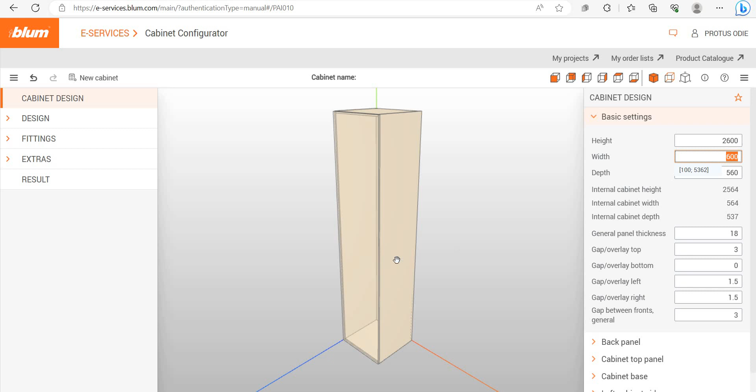The first thing you have to do is go to cabinet design, then basic settings. This is a full height wardrobe, so the height I'll use is 2600, and the width I'll put at 850.

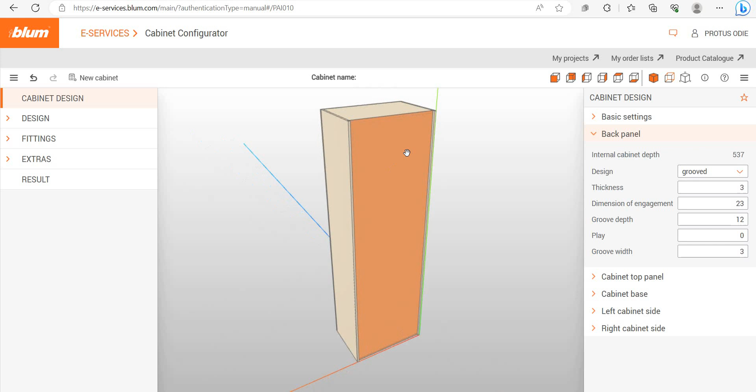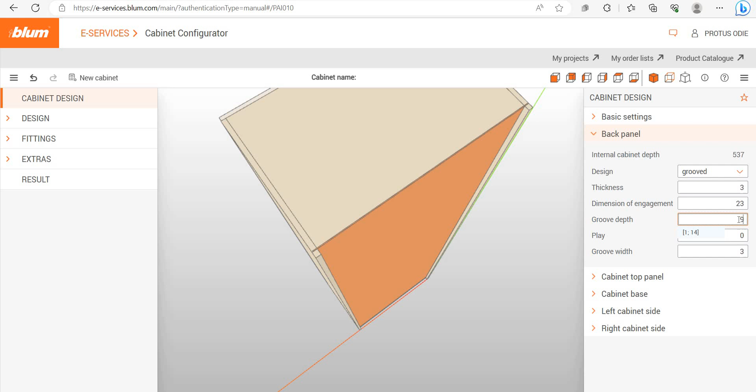The top panel and back panel is a grooved panel with a 3mm board. The grooved panel 3mm board. Then the dimension of engagement is 23. Then groove depth, let me put 9. Groove width is 3. So that's it.

Now I'll come to partition the front. Go to design, then select horizontal gap, and then the vertical gap here.

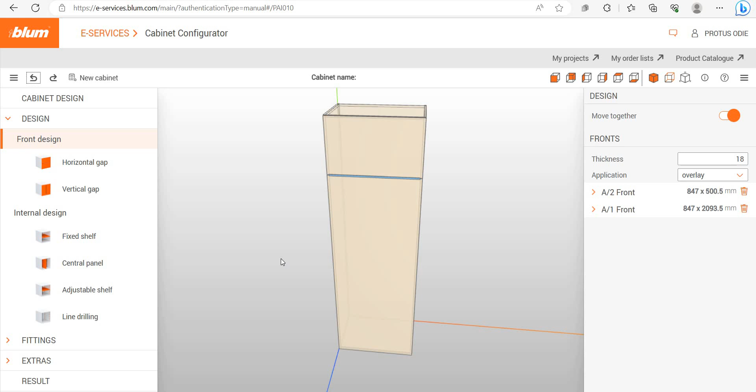Let me just undo. I wanted to create some drawers here first, the drawer panel, like the drawer front. These are 200. No, the 200 here. The 200. Another 200. And the last 200.

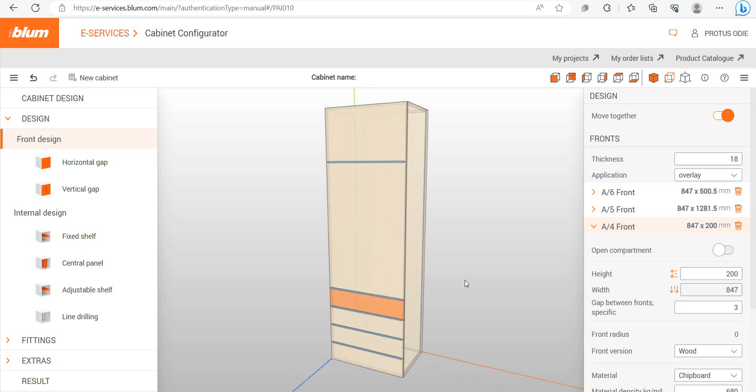And then the double door. Put the double door. There's the double door.

So this top part is 400. 400.

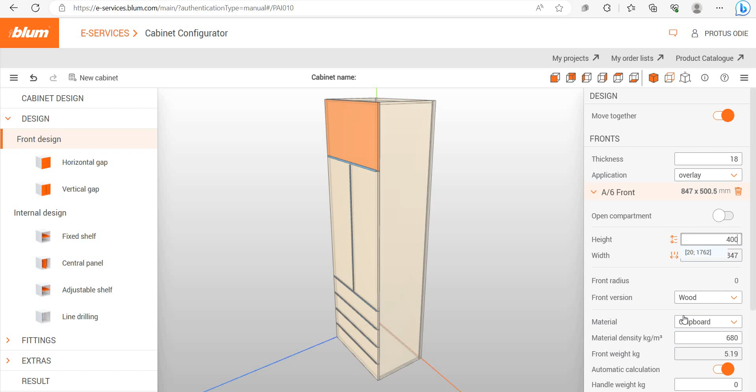Now I can go and put the shelves. Let's use fixed shelf, the first shelf, then the last shelf.

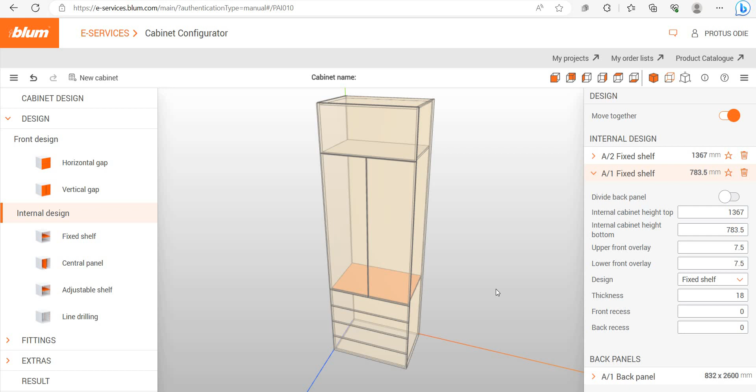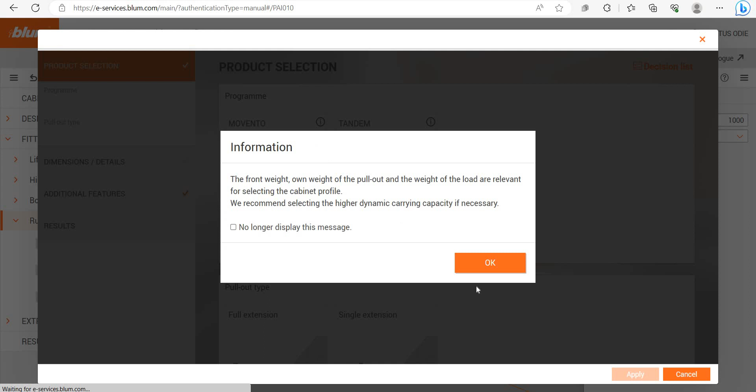Then the next step is we have to put the drawers and specify them. Go to fittings, then runner systems, then drawer high fronted pull-out. You draw the lower drawer, and then specify the settings: tandem box, full extension. So for full extension, we go next.

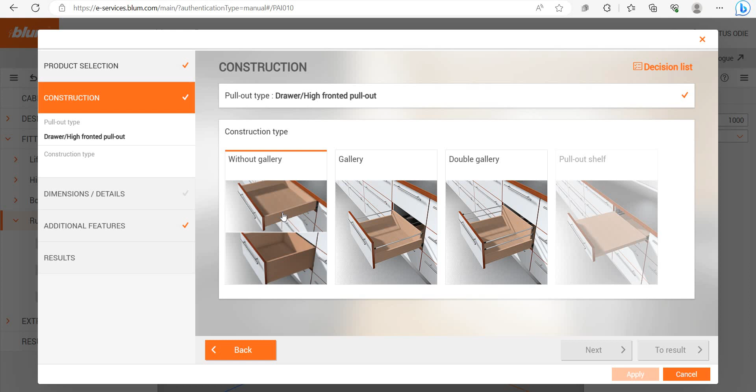High fronted pull-out without gallery. These are the specifications of the drawer, and dynamic carrying capacity 500, length of the runners. Then drawer height, I like 180.

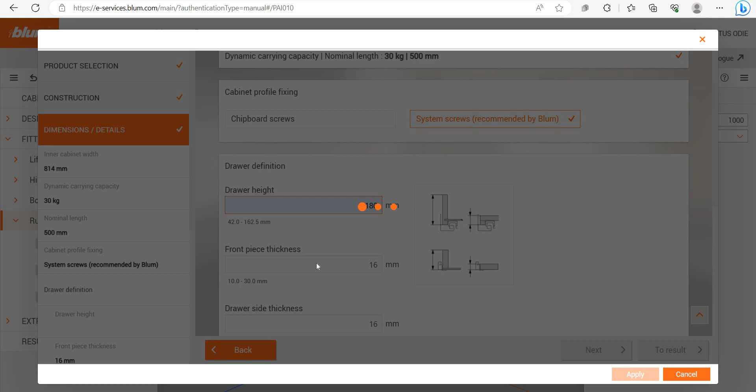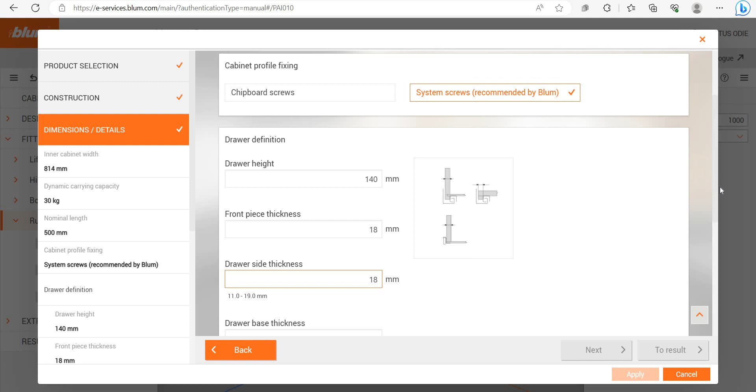This one is too short, too long. Put 140 because 140 is okay for me. Then thickness is 18. Drawer side thickness is also 18. Drawer base thickness is 3.

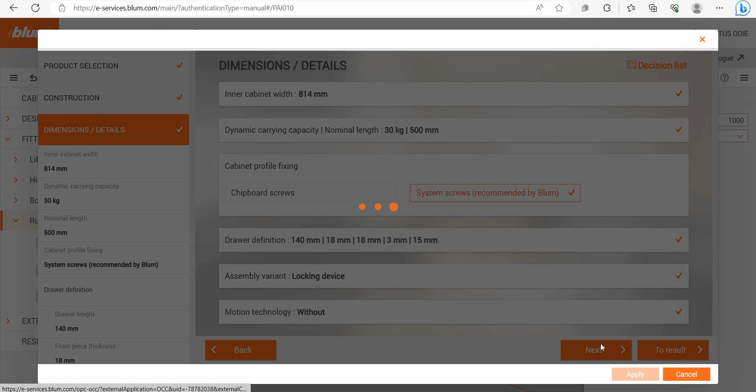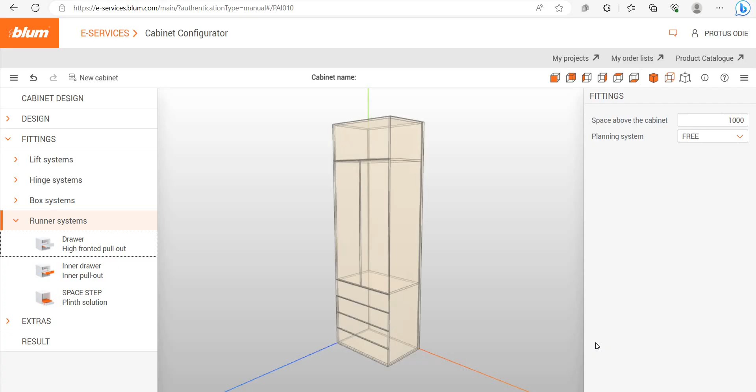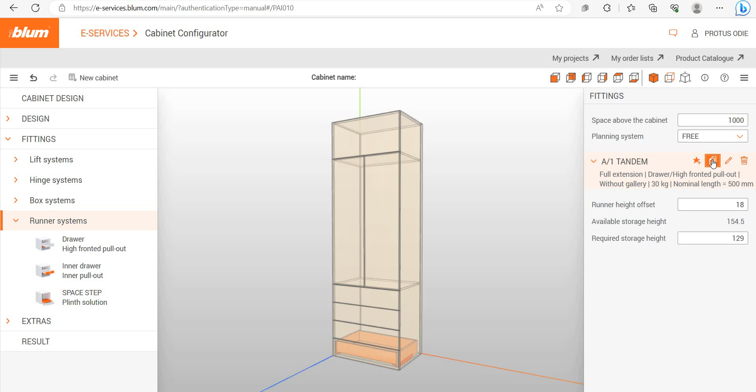Go to result, apply. So that's the drawer. Let me zoom in so you can have a look at it. So this is the Blum runners. I'd like to copy this for the others, 1, 2, 3. So that's now a complete drawer system.

And then for the door, it's just the door. So door is the hinge system. This one is the lift application, the lift application. Standard hinge, overlay.

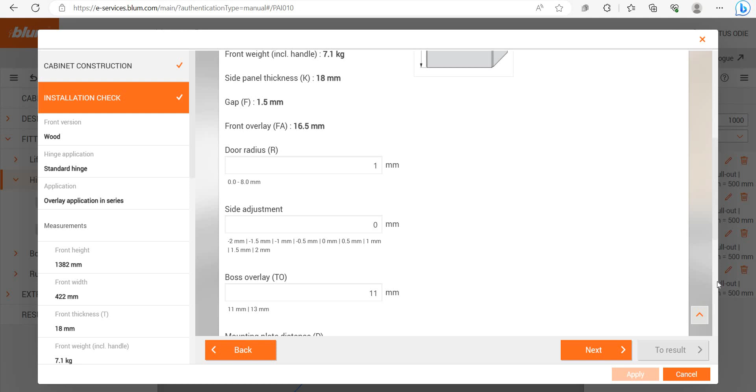So we have the measurements and door radius. Let us use the default settings. Move next.

Then clip on. This CLIP top BLUMOTION is the one that doesn't have to use screws to mount it. This one also, but this is a normal one with the screws, the MODUL, and then screws. There's no corner, then you have the screws. So let me use these normal screws.

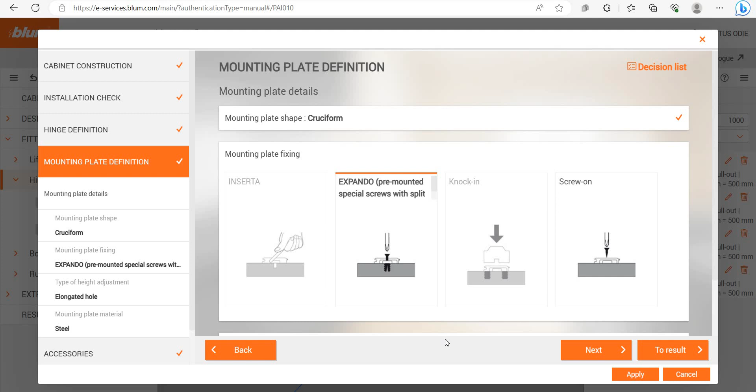Then closing mechanism with spring. Okay, with spring. And then we have to do the mounting plate fixing, we have to screw the normal one. Then chipboard screws.

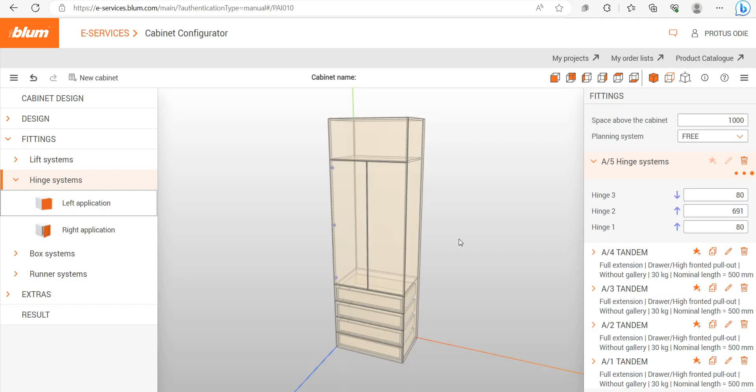Next, then hinge and cover caps. No, to cover. Then let's go to results. So these are the hardware we applied, and it's automatic. It has set it at 3 hinges. Let's see. Also, so this is the other side, the right application.

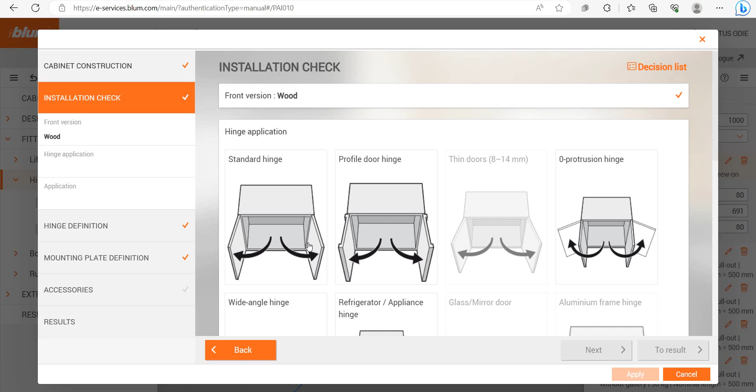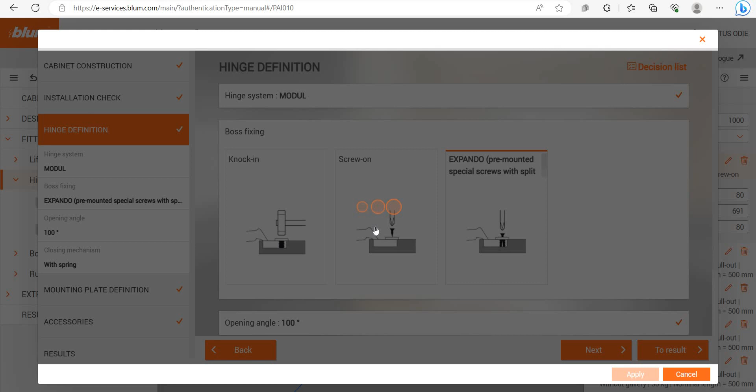We maintain the same setting as the previous. Go to next, use the default settings. MODUL, screw-on, with spring, and return. Then we have the screw on mounting plate fixing, then chipboard screws. Next, no cover caps. Then let's go to results.

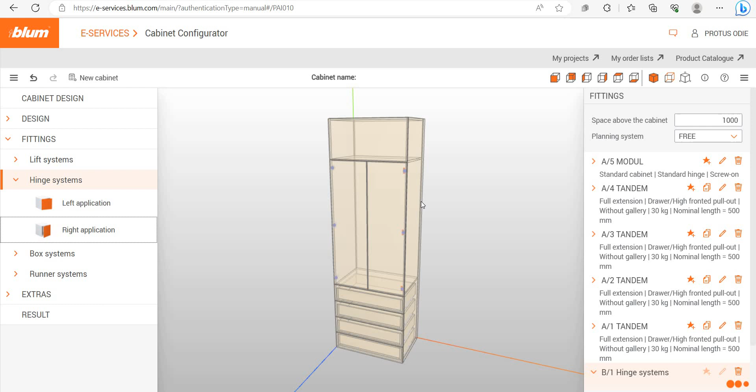Then we apply, so that's now a complete door. What else? So here also, I'd like to put the upper part also to be a double door.

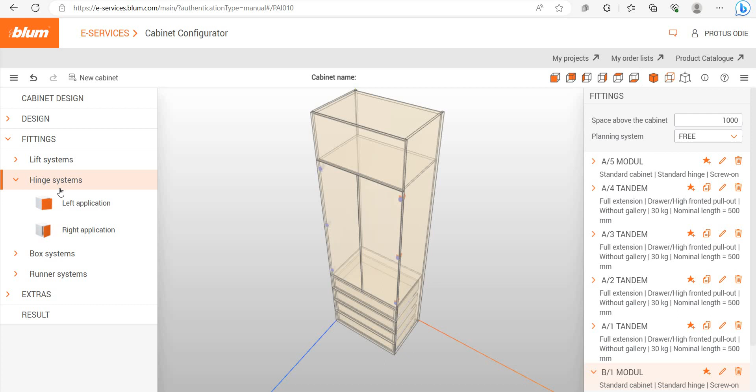There's another option you can use - you can use the lift system or the double door. But I think for me, it's possible to use the lift system, but due to the height, I think it would be difficult to use this lift system. But it's possible, maybe if it's SERVO-DRIVE.

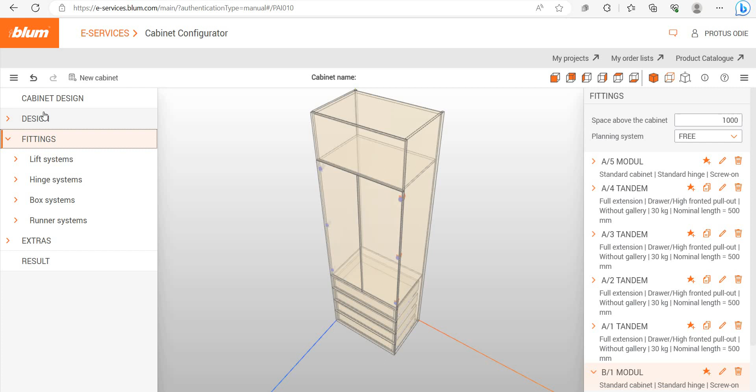So there are different designs here that can be used, but for me, I prefer the double door. So I'll have to separate, I'll have to put a gap here - no, sorry, I'll have to put a vertical gap here.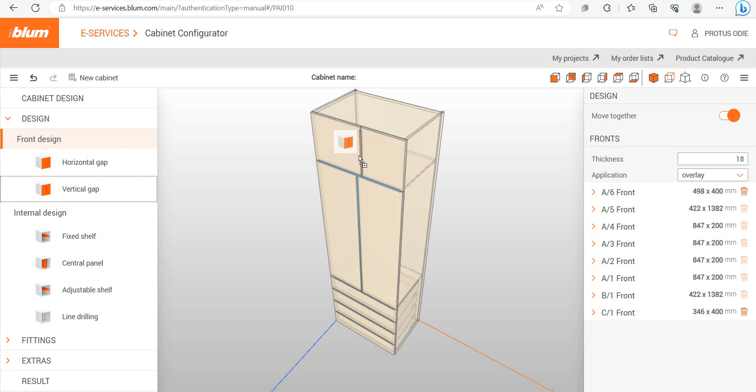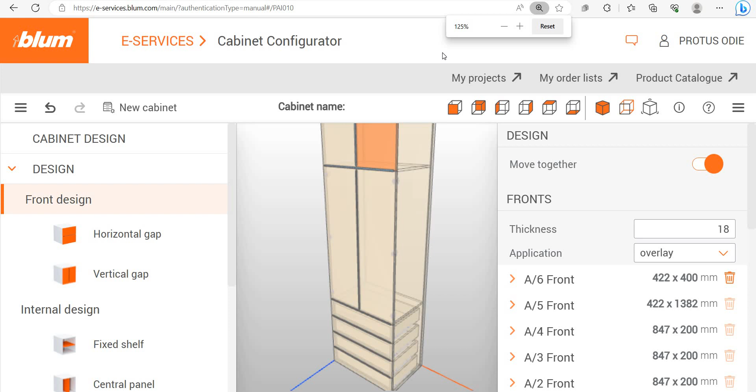Then, so and then the doors - let me put the doors here. Double door. Close this part.

Go to fittings, and then okay, we'll select the hinge, the left door, same settings, MODUL.

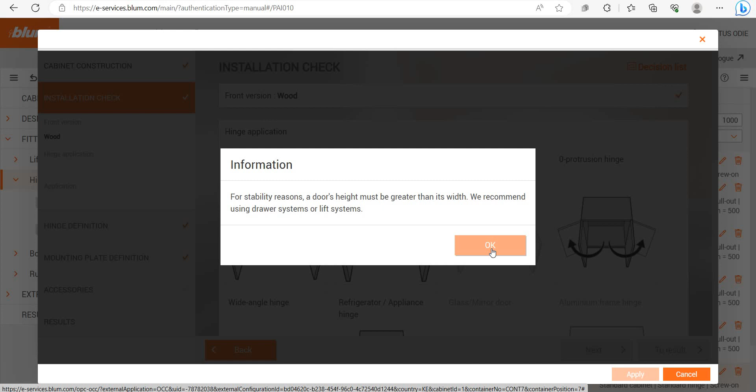For stability reasons, the door height must be greater than its width. So you remember the width of the wardrobe was around 850 millimeters, and yet the height of the door was around 400. So let me put it also at 450, the height. Let me cancel, then change the height in the design here to 450.

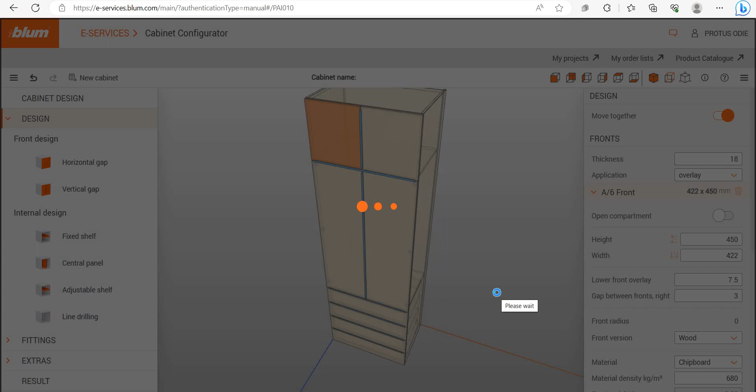And then we put the doors, the hinge system, the door. Let's see if the error removes - yes, there's no error. So we maintain the same settings, overlay application.

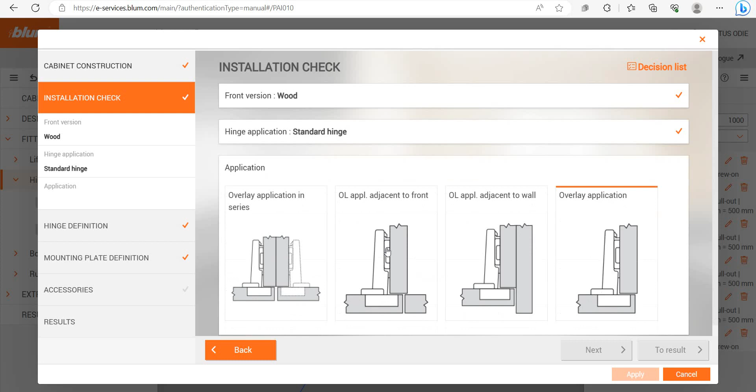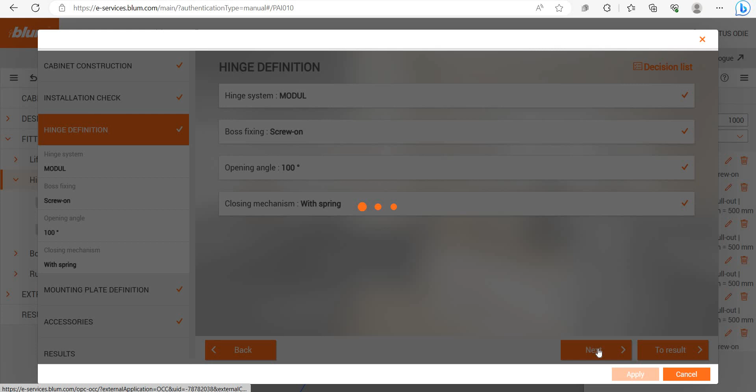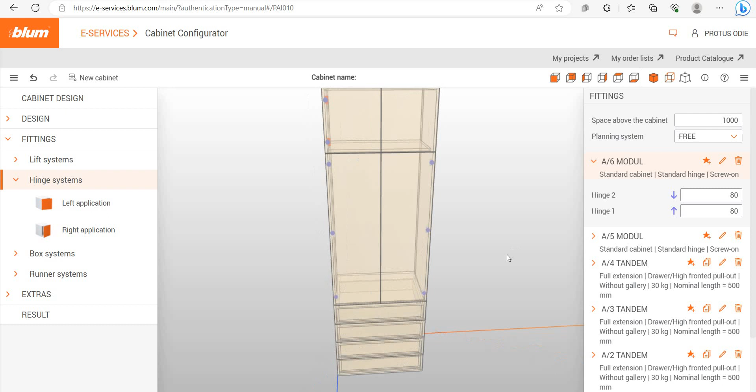And then also we maintain the same setting also as this one. Then select the MODUL, then the screw-on, then next, screw-on, chipboard screws, next, then no cover caps, next. We apply, so it also has two hinges, then the last one.

Okay, so it was a problem with this one - this one you can delete this fixed shelf, can delete it. Put a different shelf - let's put a different shelf.

And also remember, it's also possible to put the adjustable shelf.

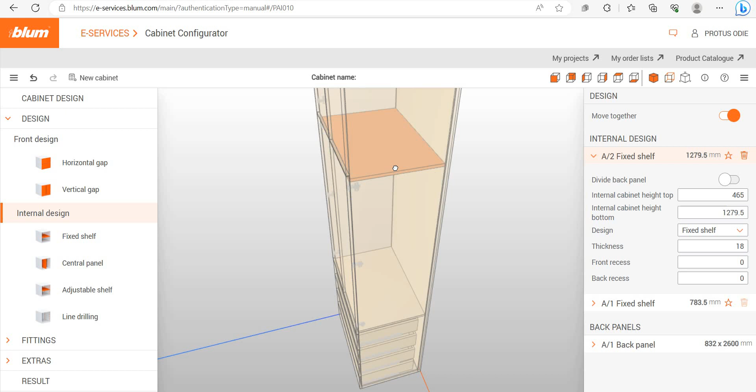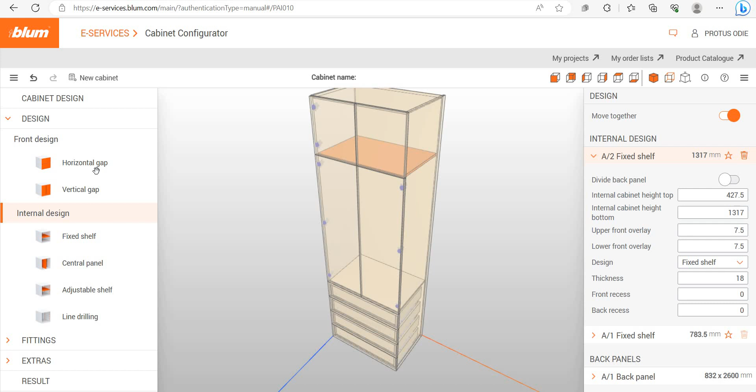Everything is okay. Yes, so also just add another hinge of the right hinge on the upper right. So same setting remains, same setting.

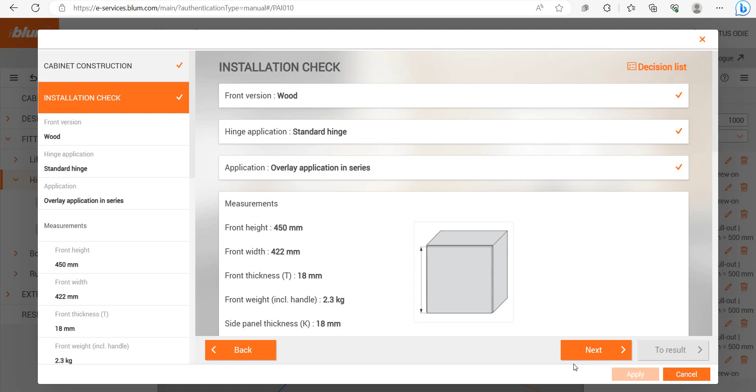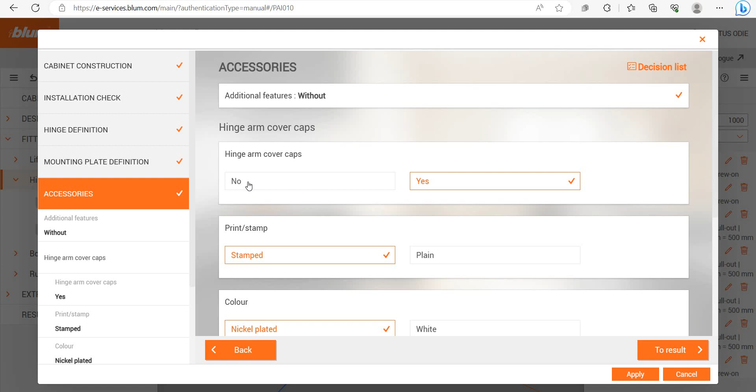Next, configurator module, screw on display. Next, screw on for chipboard screws, and then next, no cover caps is the results. Then you apply.

So this is the wardrobe. I guess the wardrobe is now complete and it looks beautiful. It's a simple wardrobe.

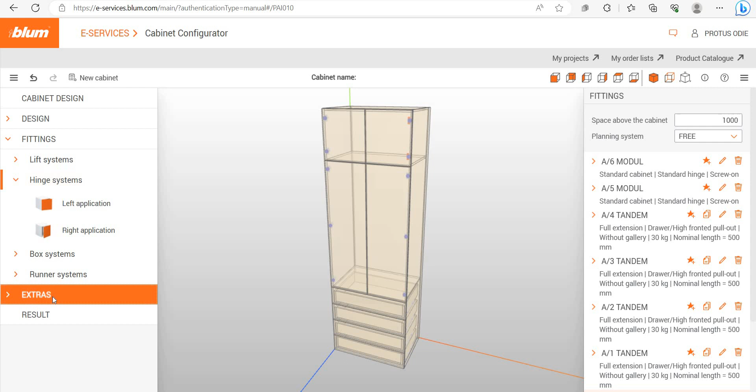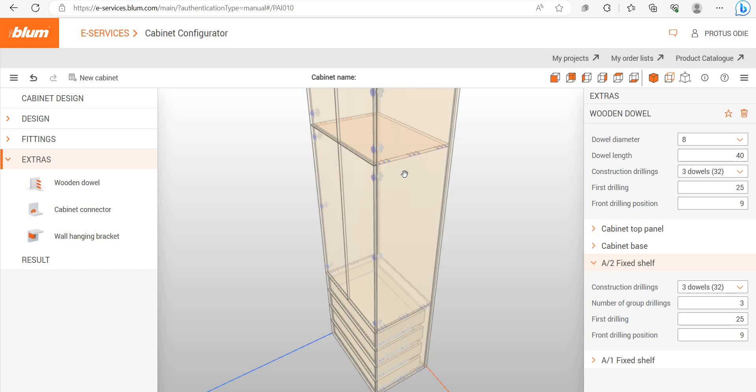So there are other functions for Blum, like you can even put dowels to this. So if you have machines like the Blum machines that are able to make the dowels - these are 8mm dowels, everything is here. So the horizontal dowels are normally cut with a special machine, and there's the vertical dowels. For example, the vertical dowels will be made on this side panel, then the horizontal on the shelf.

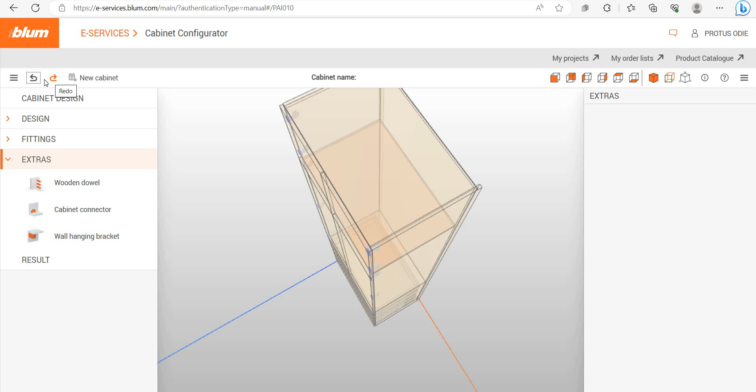So that's also optional - you can use screws, you can use dowels. You can use dowels and then reinforce with screws, or you can only use screws.

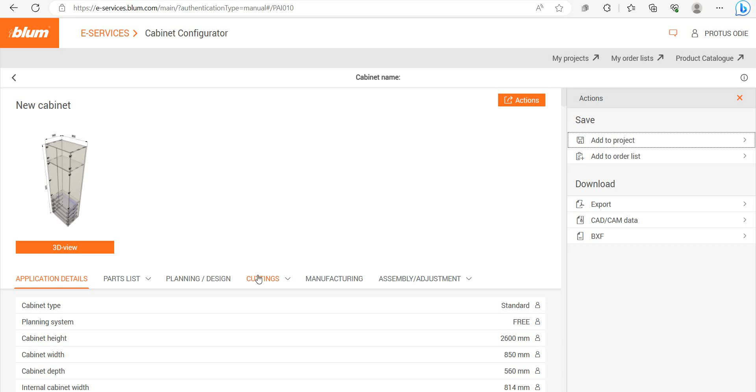Depends on one's preference. So you can go to results, and then from the results one is able to find the cutting list. You can produce the cutting list. Here is the cutting list, everything.

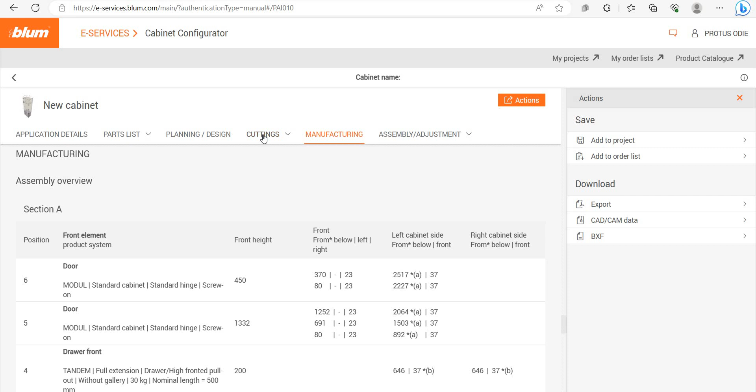Here is the cutting list, and also there's the manufacturing, there's the assembly, how you assemble the parts, there's the design, planning and design, part list, application details. Yes, so that's all. There's also an option for exporting - you can export them, export the CAD data. You can export to Fusion, to SolidWorks, and to SketchUp. Yes, thank you.